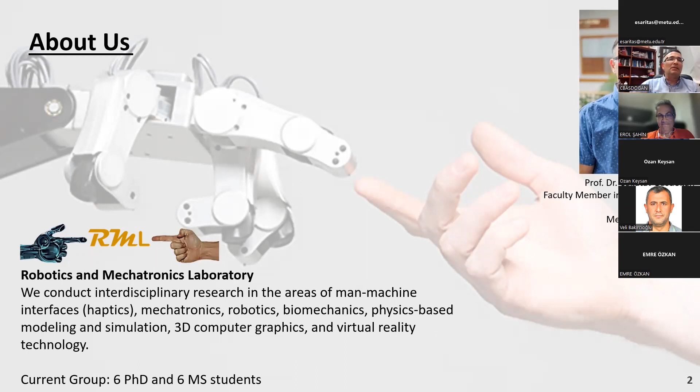Currently, I have 12 students in the lab, 6 PhDs and 6 master's students, and my current research is focused on two areas.

One is in the area of surface haptics, and I will give you a very brief information. For those of you who are interested, you can contact me for more information. In the case of surface haptics, we are able to control friction on the touch surfaces of mobile devices—so we can really control the friction on the surface of your cell phone or tablet.

This has a lot of interesting applications, including—I'll give you only one of them—online shopping is one interesting application.

For example, in the future, when you buy a sweater, you're not just going to choose the size or color, but maybe you will touch, feel, and make a decision based on the fabric as well. So this kind of interface enables you to do that. We have 4 or 5 students working in this area.

The other group is working in the area of physical human-robot interaction. I want to emphasize human-robot interaction is a large area nowadays, but our focus is physical, and that's where haptics comes into business. When you interact physically with somebody, there is exchange of forces. So our research is focused on this physical human-robot interaction.

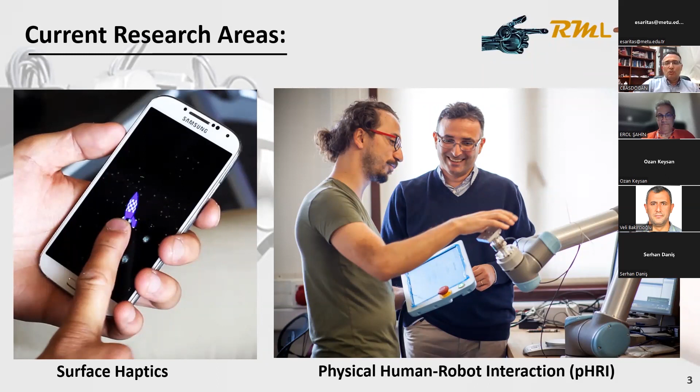So what will I talk about? I will make a quick introduction to physical human-robot interaction, but I'm assuming most listeners are familiar with that concept, so maybe I can go fast through this part. Then I'm going to talk about the application we develop in our laboratory: collaborative drilling, which is drilling done with human and robot together.

And I'm going to talk about the adaptive admittance control architecture we developed, so that we can adaptively change the parameters of the controller during the task in real time. I will also talk about the subtask classification, so we change the admittance control parameters based on the subtask classification.

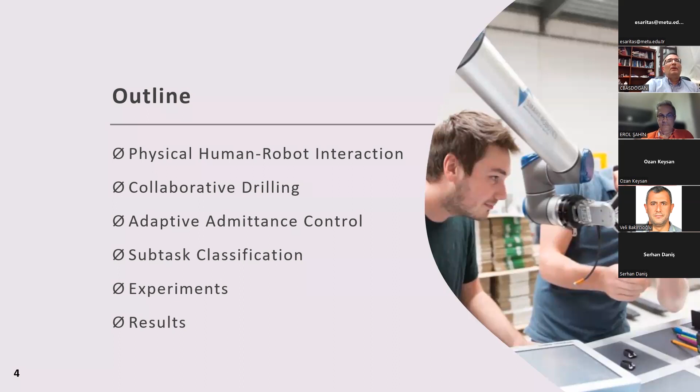We classify 3 subtasks: idle, driving or free motion, and contact. These are typically the subtasks you encounter when you do something with the robot, especially in small batch manufacturing scenarios, which I will talk about. Then I will talk about the experiments we have done and discuss the results afterwards.

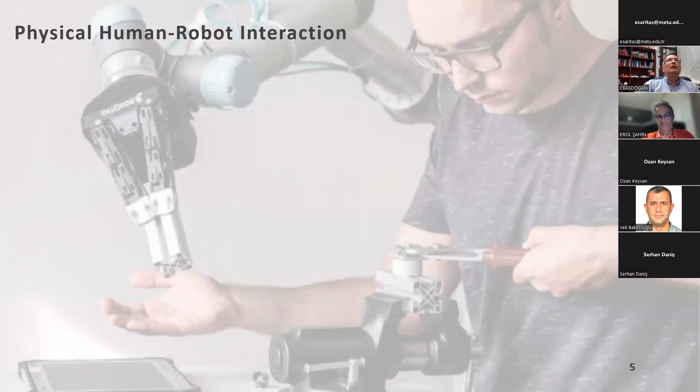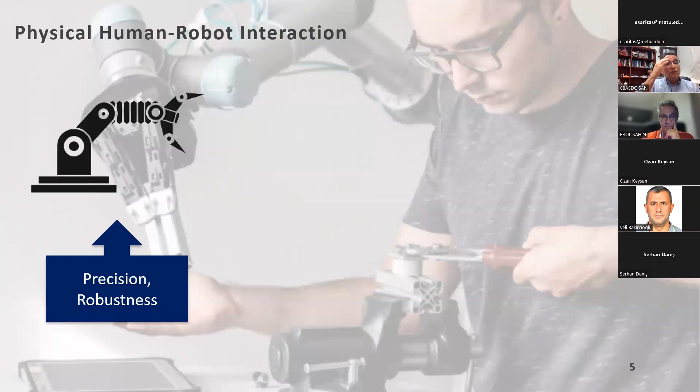Why is physical human-robot interaction important? Well, we know robots are very good at positioning objects. They can repeatedly do this. They are rigid and faster than us, obviously. These are really good, but what's still missing with robots is intelligence and awareness.

For example, you can see the bookshelf behind the screen. If I want to grab a book and put it into the shelf, I need to find an open space on the shelf and then place the book, which I can do very easily. But for a robot, this is still a very difficult task. You need cameras, and the cameras have to scan the shelf and decide how much gap is there, and whether it is sufficient to insert the book.

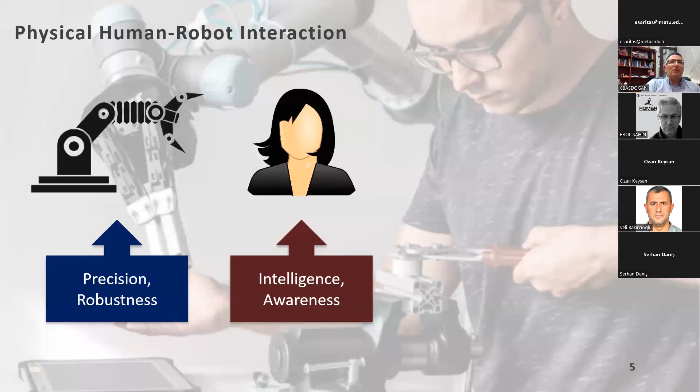Imagine I am doing this operation with a robot. I bring the robot close to the empty space, and then the final adjustment is done by the robot itself. This is the type of collaboration we are talking about: human utilizes its intelligence in finding the empty space on the shelf, and robot utilizes its precision in placing and positioning that book onto the shelf.

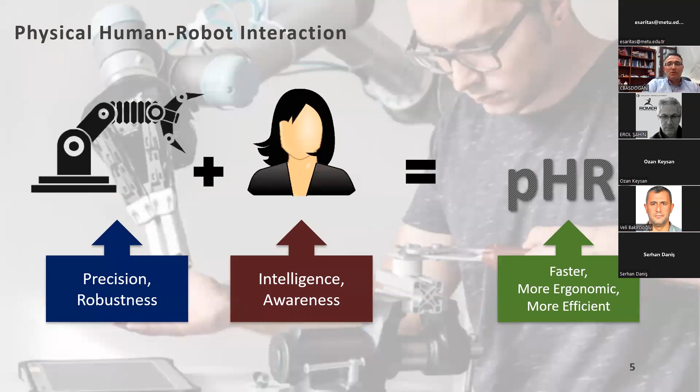So this is the type of environment architecture we're talking about. If we can implement this architecture, what we call physical human-robot interaction, then we can do the tasks probably faster. It could be more ergonomic and more efficient in terms of task performance.

PHRI has many applications. I'm going to assume this audience is already familiar with these concepts, but I will briefly mention some of the applications. There are interesting applications in the areas of manufacturing, medicine, and rehabilitation.

For example, you can assume that robot and human are transporting a heavy object together. In this scenario, the robot is handling the weight of the object, while the human is giving the direction, so that the human doesn't have to lift the heavy object. Or another scenario, again in the manufacturing environment, where human and robot are doing a welding operation.

In the case of welding, two parts are put together and then you put a weld in between them, you do welding between them, and this requires some precision. The human can bring the robot very close to the operating area, and then the robot can do the task which may require a good positioning of the welding beam.

You can extend these ideas to rehabilitation, where the human and robot are working together, and the robot is helping as needed, especially in the rehabilitation area now. Nowadays, the paradigm is assist as needed, which means any exoskeleton type of device is helping you when you need assistance, otherwise the human is doing the task. This paradigm is important because you don't want everything to be done by the robot or the exoskeleton device—that's not going to rehabilitate the patient.

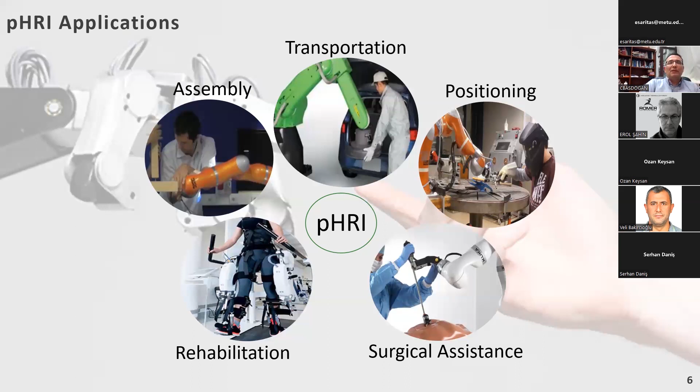I hope that this scenario motivates. In our application, we focused on drilling. It's a manufacturing application, and I'd like to tell you why we focused on manufacturing, because there are—

Oops, the light is off. Sorry about that. The lights are going off in my office, so I'm going to do this kind of strange movements during my talk.

Excuse me for that. So we focused on small batch manufacturing operations. These are the tasks that you do not on the assembly line, either because it is not cost effective, or it's not practical, or it may not even be doable—like if you're working with flexible parts or curved parts which need to be fixated, the assembly line may not be an option. So you have to do these kinds of operations out of the assembly line.

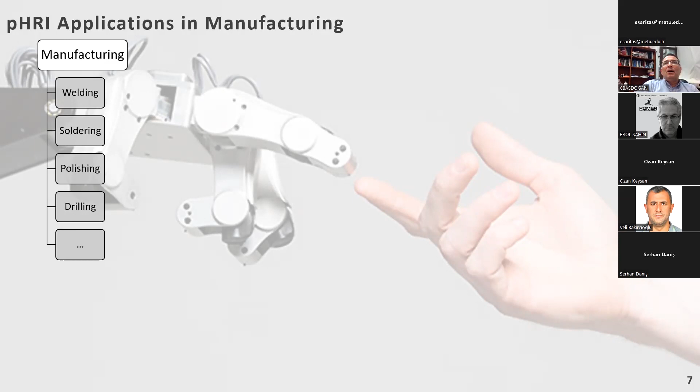These operations I'm talking about, like you've already seen one example—welding, soldering, polishing, drilling—they all involve some type of contact with the environment. And then we picked one of them.

We picked drilling because we were funded by the Turkish Science Foundation, and one of our collaborators was a company developing machinery for woodworking, and they were interested in integrating robots into their systems. While discussing with the company, we came up with some interesting applications, which I'm going to talk about here.

In the scenario I'm discussing here, you can see the human and robot are working together to open a hole on a workpiece. This workpiece is a wooden workpiece, and it's a flat surface here. The goal is human and robot working together, with the robot helping the human do this task more accurately and precisely.

There is a location given on the wooden piece, and the drill depth is given. You can see the components of the system—we have this cobot, a collaborative robot, the KUKA LBR iiwa robot. This is the collaborative robot that we use.

You can see, I hope you can follow my cursor. Can you follow my cursor during my talk? Yes? Yes, we can. Okay, great.

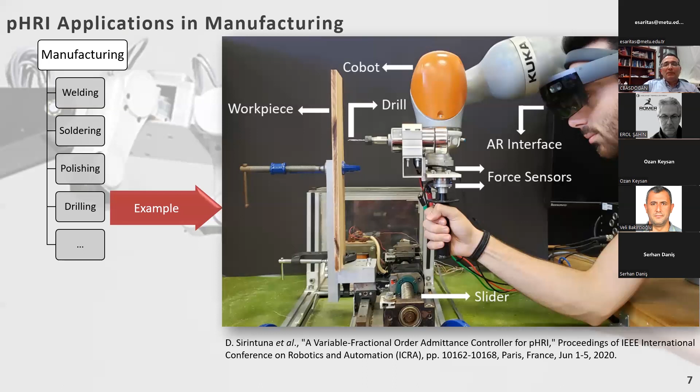All right, let me move on. This is how we started the work, drilling on wooden workpieces. You may ask, what's the idea here, why is it so interesting? Our partner said the real challenge is to drill something on a curved surface. Opening a hole with a drill in your hand, on a curved surface, with a certain desired angle, is very, very challenging, almost impossible. We tried many times in the lab, actually.

If I mark one of these points on the screen, like 1, 2, 3, these are the drilling points. If I say go to point number 1 and open a hole at an angle of 30 degrees to the surface, that's not possible - very hard to maintain that angle. So we started thinking about how we can get help from the AR interface and from the robot to do such a task.

The idea here is the human selects the drill target location - let's say one of these points you see on the screen - and marks the point. Then they bring the drill bit close to that point and roughly align the drill angle using the HoloLens interface. You can see on the lower right the HoloLens interface: a white arrow superimposed on point 1, and a red circle. The red circle represents the drill point and the white arrow represents the drilling angle. This information is superimposed on the real wooden workpiece.

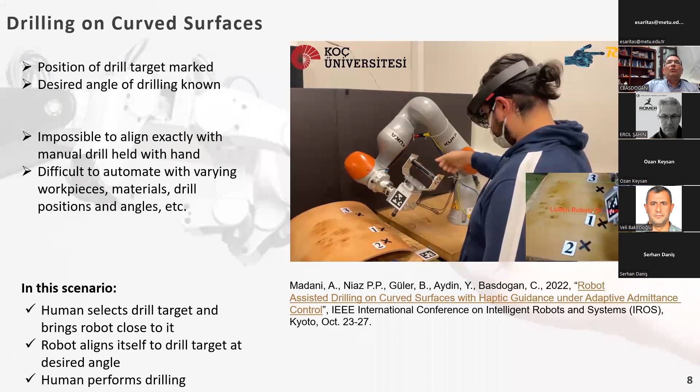I hope you can see it. The user holds it and moves to the drilling target, let's say number 1, bringing it sufficiently close and aligning roughly. Now you see the robot taking over, making perfect, accurate alignment. Now the robot is ready - you can push the drill, and it's not going to move in any direction other than the drilling direction. You can make the hole and move to the second or third point.

Here the user decides the drilling point and the drilling angle. This is the idea behind flexible manufacturing, flexible automation. In the extended video, you can see the user hold the workpiece and the operation still works - it doesn't have to be fixed on the table, because we track the movement of the workpiece using Aruco markers attached to it. We know its position and orientation, so you can make holes with desired angles even while holding the workpiece yourself.

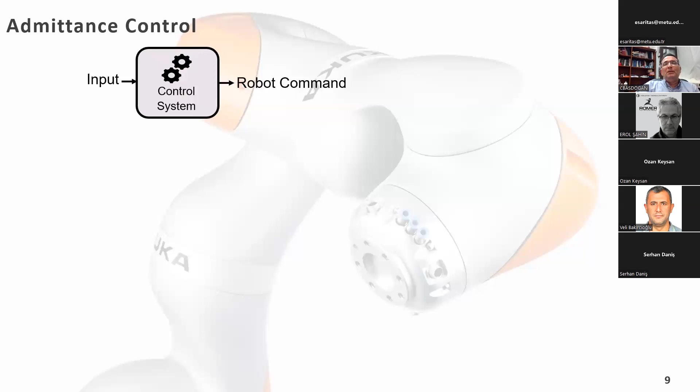In the case of admittance controller, the interaction force - remember there are two force sensors, one measuring the interaction between the drill bit and the surface - is input to the admittance controller. It's not very sophisticated, it's something simple: 1 divided by mass times S, where S is the Laplace variable and B is the admittance damping. Here M is the admittance mass, B is the admittance damping. It's a very simple controller.

So here you input the interaction force and it generates some reference velocity or desired velocity, and the internal controller of the robot follows that desired reference velocity.

We extended this concept. This is a typical admittance controller, officially called the integer order admittance controller. We extended this concept to the fractional order admittance controller. The main difference between integer and fractional order is the power above the S term, the Laplace term - there's something called alpha. This is the fractional order, so that's the main difference.

In a simple sense, it adds one more parameter to your controller to regulate the interactions. So what is this fractional order control? What's the idea behind it?

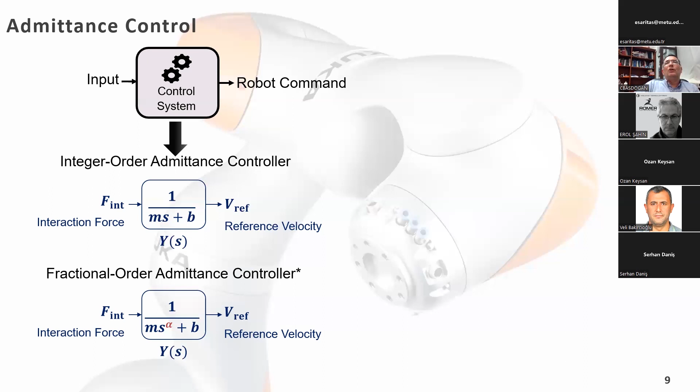In a simple sense, it adds another parameter that you can utilize for regulating the interactions between human and robot. We have some detailed publications on that topic - I'm not going to go through the details, but more information can be found in those publications.

So the idea is: interaction force - if you look at the simplified control diagram, the interaction force you're measuring goes through a low pass filter to eliminate noise in the measured signal, and is input to the admittance controller. The admittance controller generates a reference velocity, which is supplied to the robot, and the internal PD controller of the robot aims to follow that desired trajectory, and that loop goes on.

This is actually a simplified version of this loop - more details are available in our publications. I'm hoping that with this slide you can now differentiate between trajectory control and interaction control, and I can move on.

So what's the idea? We focus on adapting this admittance controller - adapting means we want to adapt the parameters of this controller. In the integer order controller there are two parameters: admittance mass and admittance damping. In the fractional order controller I have three parameters I can control: admittance mass, this fractional coefficient alpha, and the admittance damping.

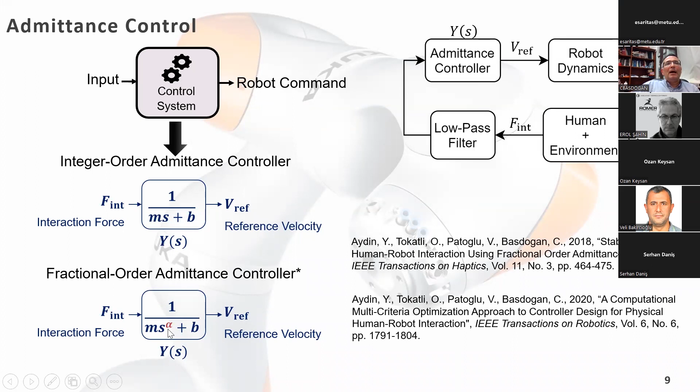So we said that, okay, if we change, we can define the task like any small batch task, such as drilling, into three phases. You can extend this concept to other tasks easily, or increase the number of subtasks. In our scenario, we simplify it: there is an idle phase, the start of the task. There is a driving phase, meaning the human is pushing the drill and robot towards the target - we call that free motion or driving phase. And then there is contact. You can generalize this to many other small batch operations.

Think about it, like welding - same, cutting is same, polishing, soldering. All of them involve this idle phase, which marks the beginning of the task, and then you have a driving subtask like free motion, no contact with anything, and then you have the contact.

So our idea is really simple: using measured signals like force signals and also velocity, can we detect these subtasks using machine learning techniques. Once we detect the subtask, which phase you are in, then I can adapt the control parameters of the admittance controller. During idle phase, I can start with some medium amount of damping so the whole structure doesn't shake when I hold the handle. During driving, I can have very low damping so the robot becomes compliant and follows my motion easily. But during the contact, or during the actual drilling, I can make the robot rigid by increasing the damping, so I can dampen the oscillations and vibrations during contact. That's the main idea here.

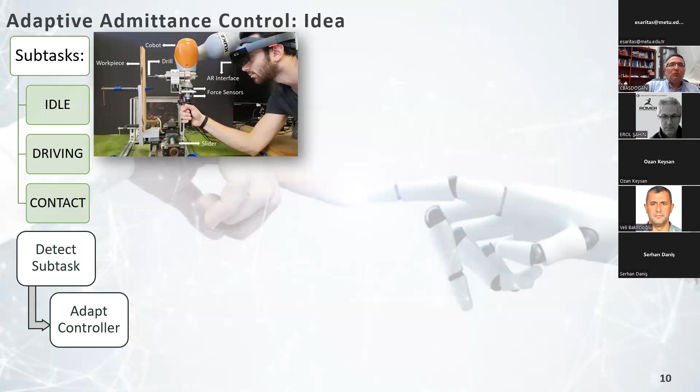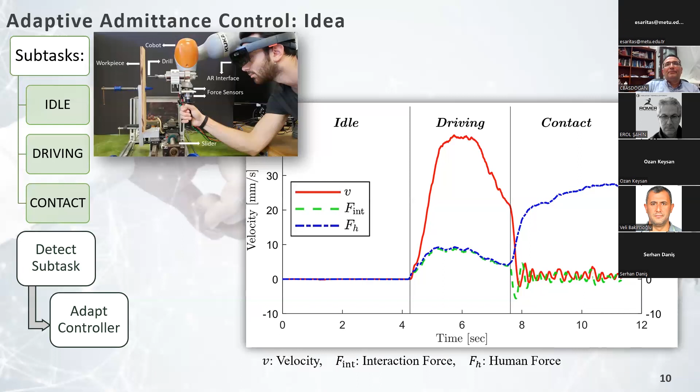All right, so once you detect the subtask, once you know what phase you are in during the task, then you can adapt the control parameters. We do the adaptation of damping - we don't touch the mass. We play with the damping, which is more intuitive if you think about it.

So you display some nominal amount of damping during the idle phase, so when I go and hold the handle, it doesn't shake. Then after holding the handle, as I push it towards the workpiece, I set the damping to a low value so the robot becomes compliant, showing very little resistance to my movement. Then when I detect the contact phase, I increase the damping to make the system more stable.

In our articles, we talk about this trade-off between what we call transparency - minimal resistance to human behavior - versus stability, which is important during the contact phase. Transparency is important during the driving phase, while stability and safety of the human is important during the contact phase. And transitions have to be done smoothly - it cannot be abrupt transitions of the admittance damping value. So we interpolate the values over some time interval, trying to make the passage from one phase to another smoother.

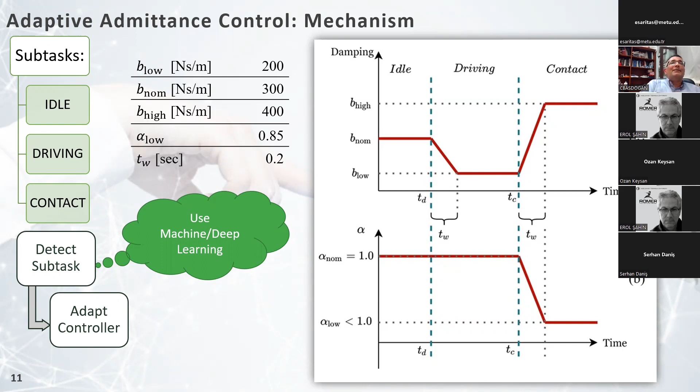All right, so how will I detect the subtask? The idea here is using machine learning or deep learning, rather than rule-based techniques. You could use a rule-based technique, defining some rules based on the recorded signals of velocity, human force, and interaction force, or you could use machine or deep learning techniques. We prefer machine or deep learning because as users change, as the environment changes—for example, the object you're drilling, the workpiece, could be wood or metal—the forces will be different. So defining thresholds or rules is not going to be easy. That's why we prefer deep or machine learning techniques to identify or classify these subtasks.

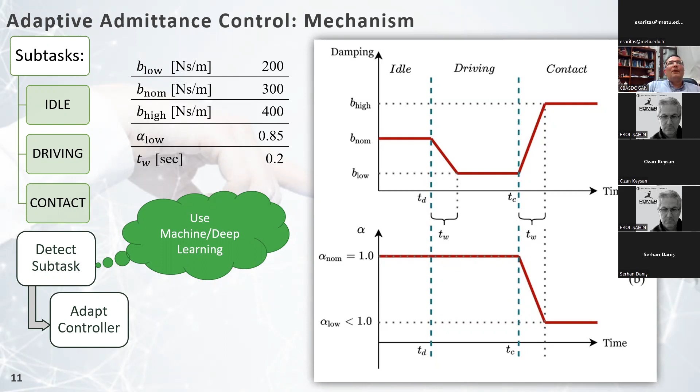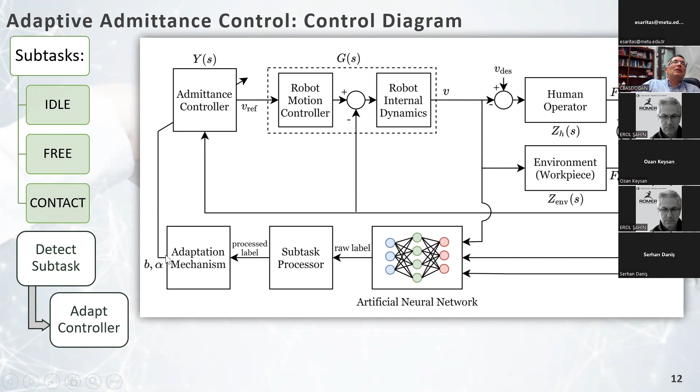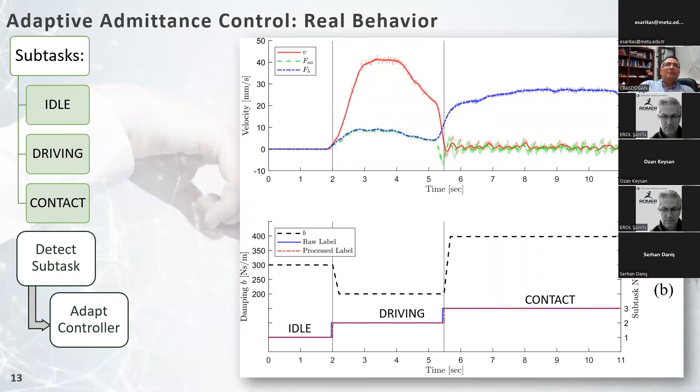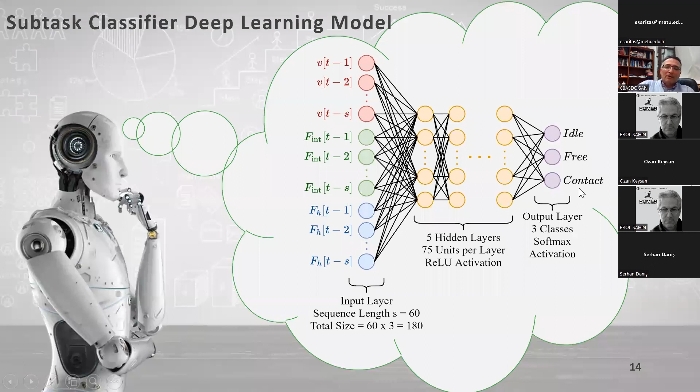All right, so we did the training and testing with different workpieces, for example, to demonstrate the idea. In the case of training, we use plywood, which is kind of like hard material compared to the cardboard, which is very soft, that we use during the testing experiment. So the contact forces, interaction forces were significantly different from each other.

And we tested 3 different controllers. C1 is a fixed integer order controller, so admittance, mass, and damping are constant, no adaptation in C1. In C2, we only adapt the damping, so it's an adaptive integer order admittance controller. In C3, we adapt damping and then the fractional order parameter.

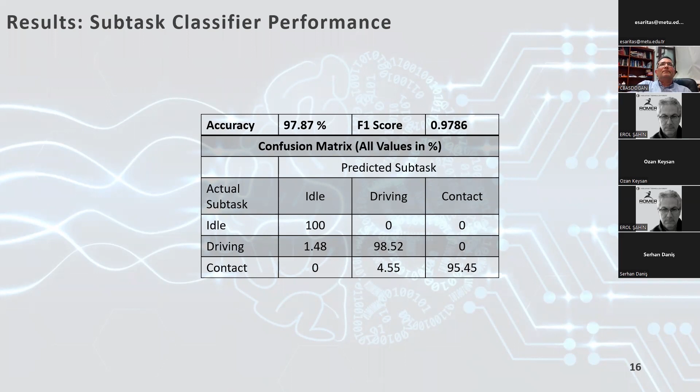Once we see that the subtask classification idea is working, we wanted to see the differences between these controllers, C1, C2, C3. So to be able to compare these controllers, we wanted to define some performance metrics.

These are the performance metrics we define. We measure the average human force during the driving phase, the average velocity during the driving phase, and the effort during driving phase, because the goal is to reduce effort during driving by adaptation, making movement easy with less resistance from the robot. Also during contact, we want less oscillations and more stability. One way to quantify stability is contact oscillations between the drill bit and the workpiece, so we measure the amplitude of oscillations during the contact phase. These are our performance metrics.

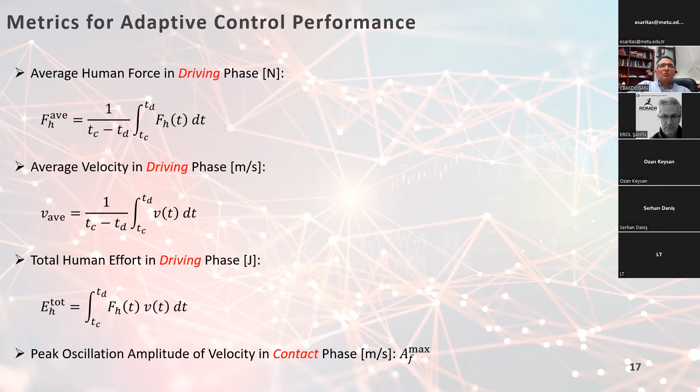In terms of the performance metrics, these are our results, shown on the screen. C1, C2, C3 are the controllers we want to compare. C1 has no adaptation. C2 and C3 have adaptation of the control parameters. In C2, only one parameter is adapted. In C3, we adapt two parameters, especially the fractional order parameter, to get more stable results.

You can immediately see, if you look at the graph on the right, that contact oscillations are less in the case of C3. So really this introduction of the alpha parameter, as we observed in our theoretical analysis, improves the stability and reduces the oscillations.

In terms of human effort, I want to mention that the stars at the top of the bars show statistically significant differences. Let's look at the third graph from the left, effort made by the human. During the driving phase, the human puts a lot of effort under fixed admittance, and less effort under adaptive admittance. This is something we were expecting. You can see the red bar is different than green, and red is also statistically different than blue, but there is no difference between green and blue.

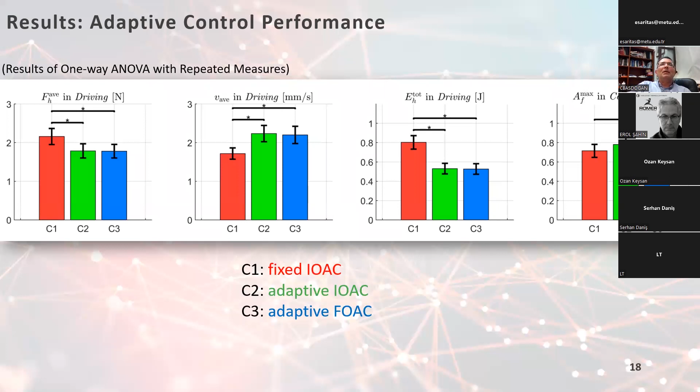So in terms of performance, C2 is kind of similar to the performance obtained in C3. In general, what we can say is we are obtaining less effort in the driving phase if we use an adaptive controller. And if we use a fractional order controller compared to an integer order adaptive controller, we also get more stable interactions between the drill bit and the workpiece itself.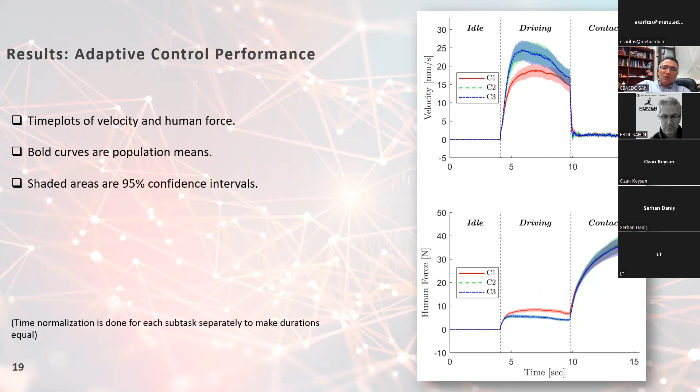So the conclusion is that this idea of subtask classification for adaptation of control parameters is a valid idea. It can be extended to other small batch operations I mentioned earlier, like welding, cutting, soldering, polishing, because those tasks also involve the same three subtasks: idle, driving or free motion, and contact.

Adaptation is good in terms of reducing human effort and also improving stability during contact. And it looks like the fractional order adaptive controller is a bit better than the integer order adaptive controller, especially during the contact phase of the task.